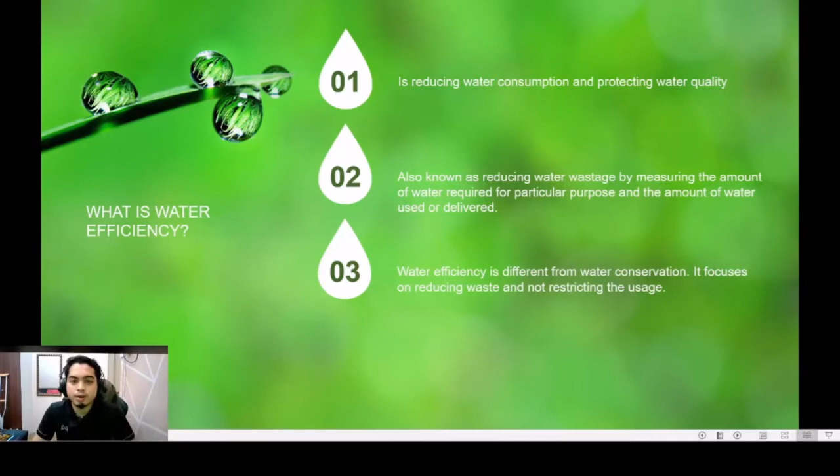Now, what is our strategy for water efficiency? First, we will minimize water discharge. Then we will use 100% wastewater recycling. After that, we use a rainwater harvesting system. Then we use high efficient water fittings. And last but not least, we will use the grey water system.

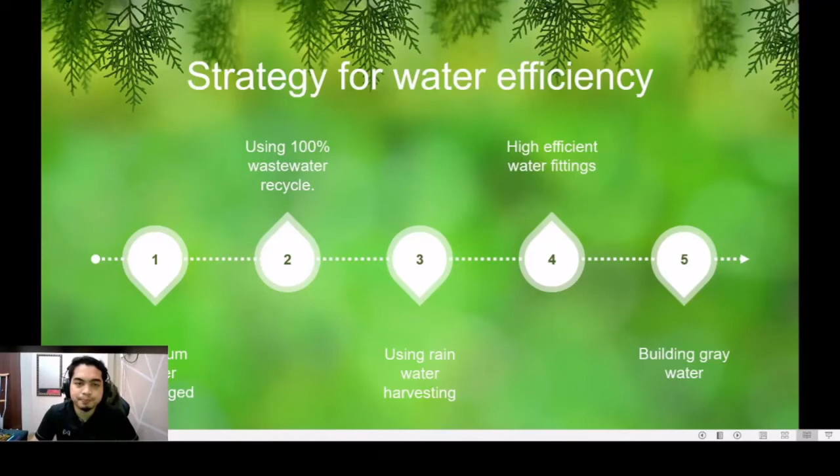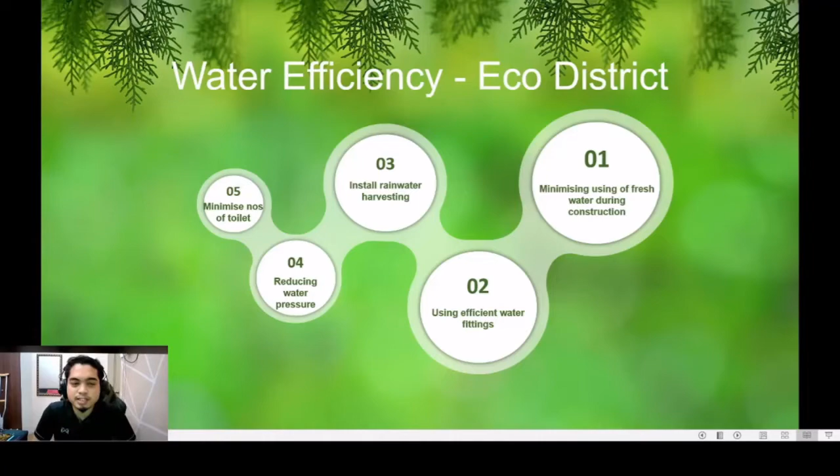So here I'm going to share the water efficiency that we apply in Eco District. First, we minimize the use of fresh water during the construction of Eco District. Then we use efficient water fittings, which is the water closet that only uses 1.28 liters per flush. After that, we install rainwater harvesting. Then we reduce the water pressure in the building. Last but not least, we minimize the number of toilets used in the building.

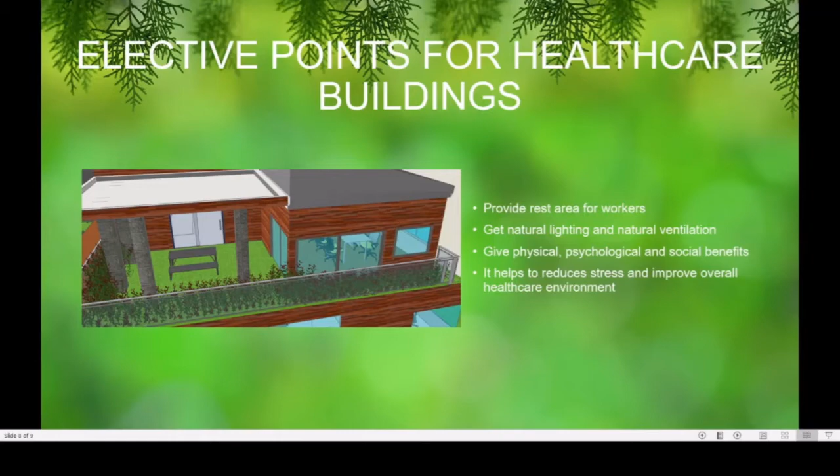Now I will explain about elective points for healthcare buildings. In this building, we provide rest areas for workers. It will give natural lighting and natural ventilation to workers, and also give physical, psychological and social benefit to workers. It helps reduce stress and improve the overall healthcare environment as well. So that's all from me. Thank you.

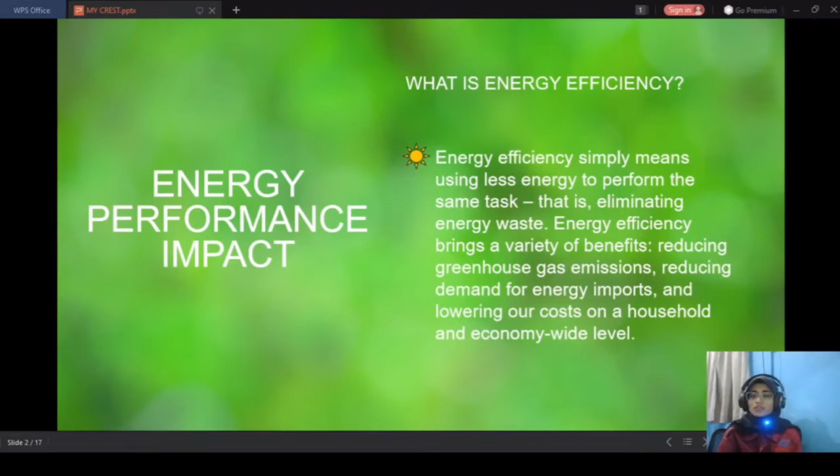Energy efficiency simply means using less energy to perform the same task, that is eliminating energy waste. Energy efficiency brings a variety of benefits such as reducing greenhouse gas emissions, reducing demand for energy imports, and also lowering our costs on a household and economy-wide level.

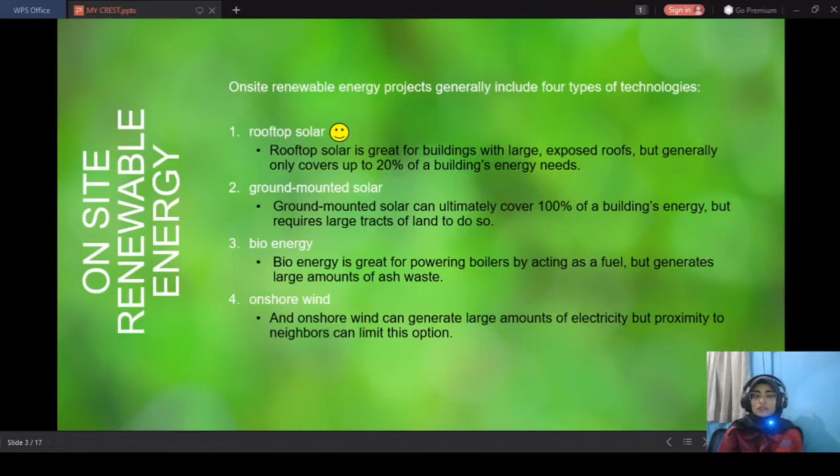For our building, we'll be using on-site renewable energy. There are 4 types of on-site renewable energy. The first one is rooftop solar, which is great for buildings with large exposed roofs but generally only covers up to 20% of a building's energy needs. Ground-mounted solar can ultimately cover 100% of the building's energy but requires large tracts of land. For bioenergy, it's great for powering boilers by acting as fuel but generates large amounts of ash waste. And onshore wind can generate large amounts of electricity but proximity to neighbors can limit this option. So this leaves us with only rooftop solar as the best design to use for our building.

For our building, we'll also be using passive solar design. Passive solar design means using the sun's energy for heating and cooling of living spaces by exposure to the sun. When sunlight strikes a building, the building can reflect, absorb, and transmit solar radiation. This will lower the use of lighting and small power.

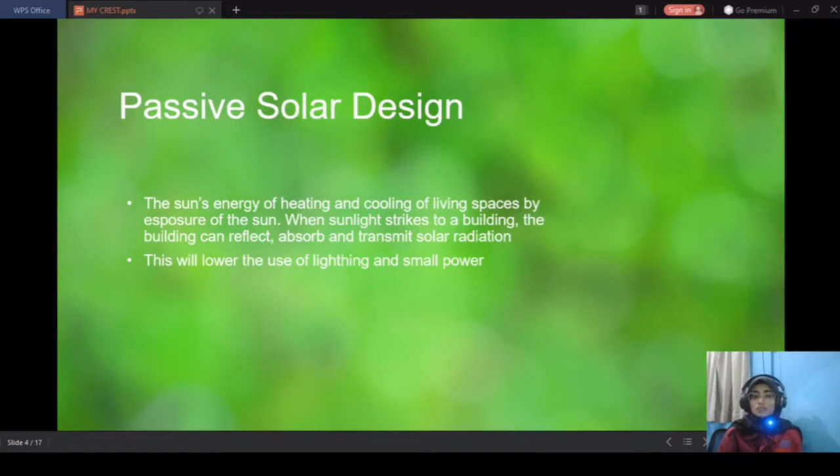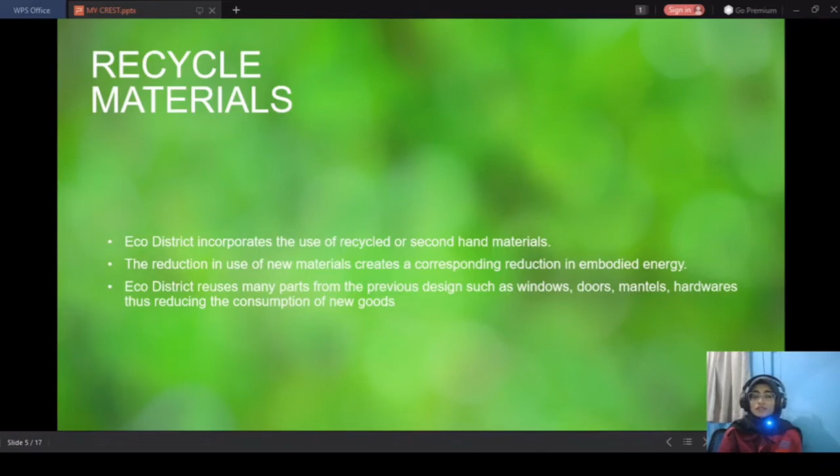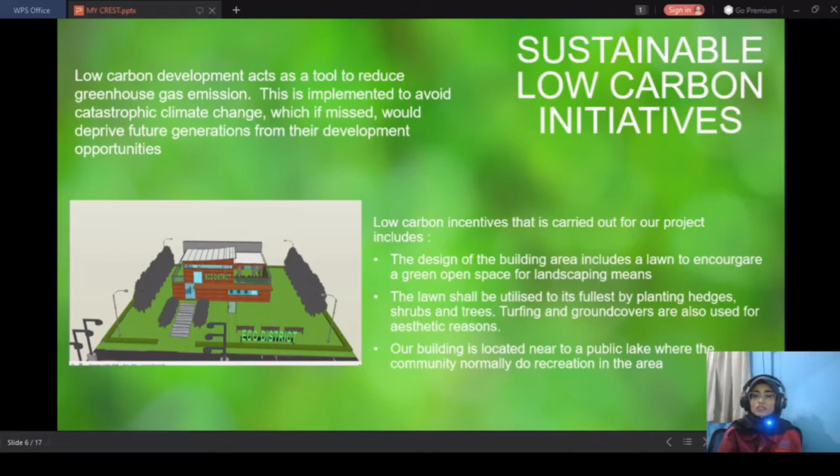Sustainable low-carbon initiatives: low-carbon development acts as a tool to reduce greenhouse gas emissions. This is implemented to avoid catastrophic climate change, which, if missed, would deprive future generations of their development opportunities. Low-carbon incentives carried out for our project include greening the building area, including a lawn to encourage a green open space for landscaping. The lawn shall be utilized to its fullest by planting hedges, shrubs and trees. Turfing and ground covers are also used for aesthetic reasons. Our building is located near a public lake where the community normally does recreation in the area.

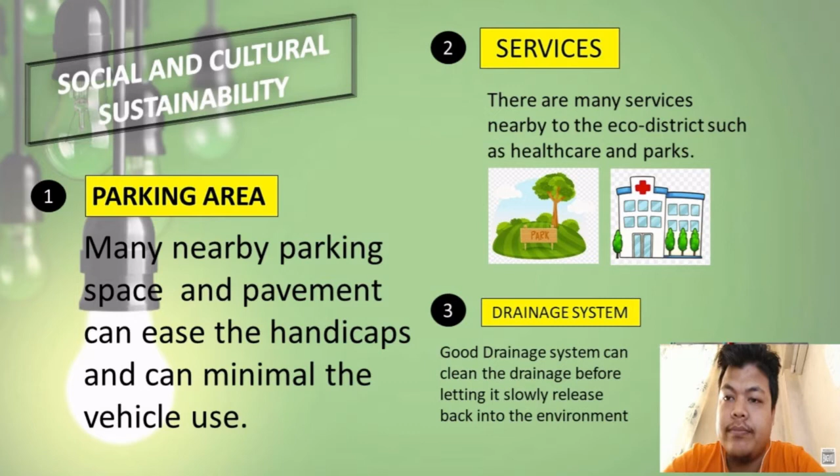In this case, the first is many nearby parking spaces and pavements surrounding the building. This can ease access for the handicapped and minimize vehicle use.

Second, there are many services nearby to the eco-district, like healthcare and parks. This can facilitate the affairs of nearby residents.

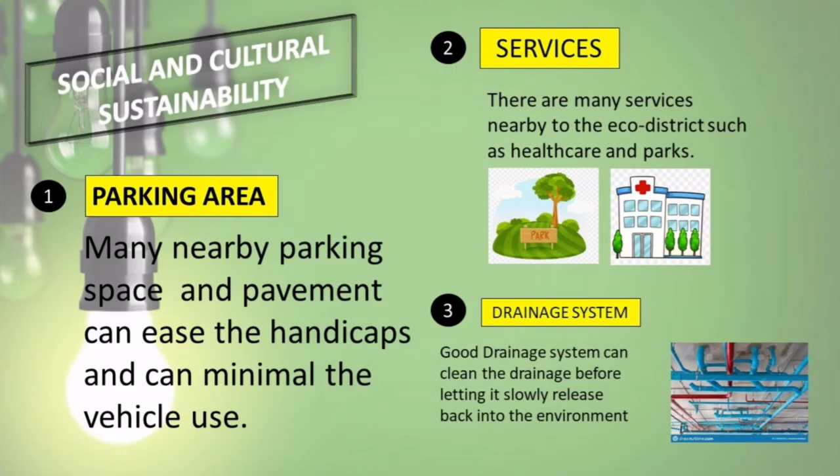Third, it has a good drainage system where it can clean the drainage before letting it slowly release back into the environment. Next, during the construction stage, we have reduced dust pollution. This is to avoid depletion of the ozone layer, haze, acid rain and global warming.

Next, we value a safe work environment to prevent accidents at the project site. We also use properly disposed waste and good sanitation during the construction stage. Lastly, we provide a MyCREST facilitator to make sure the work is done properly.

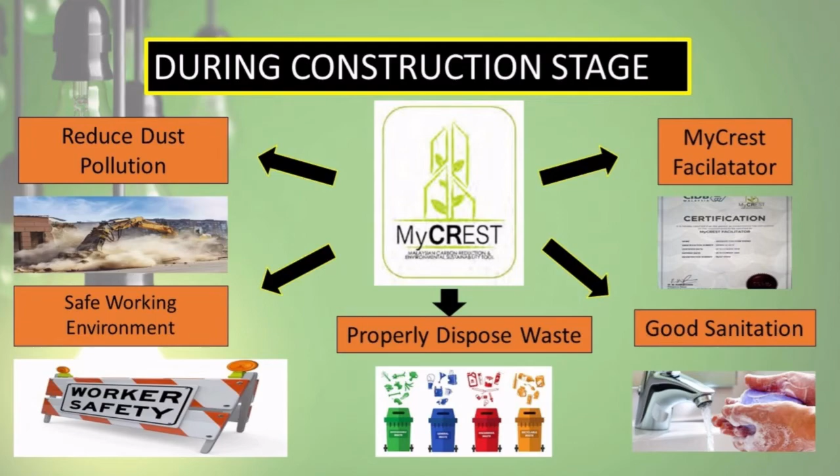Hi, this time I will explain about occupant health. In this regard, I focus on indoor air quality, where good air quality in and around the building is good to ensure the health and comfort of the occupants of the building.

In addition, we emphasize understanding and controlling general pollution in the office to reduce the risk of internal health problems. For the building, we use motorized mechanical ventilation air conditioning (MAVC) and install refrigerant components to reduce the cost of the building.

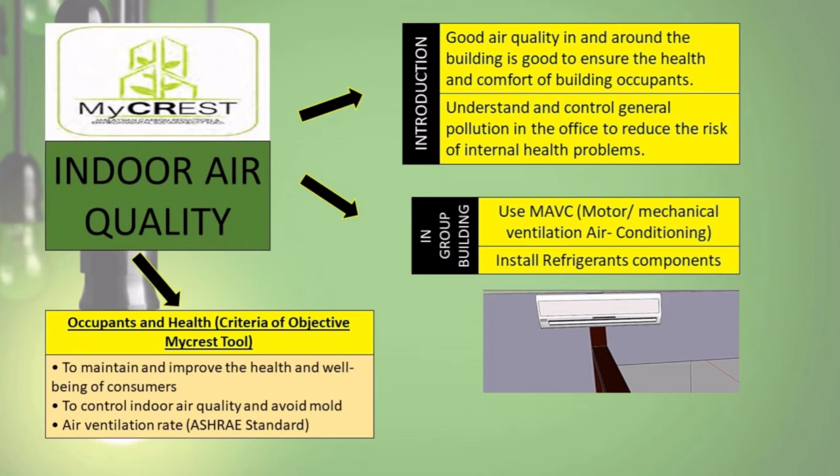Next, the criteria of the MyCREST tool in occupant health is to maintain and improve the health and well-being of consumers, and control indoor air quality and air ventilation rates based on ASHRAE standards.

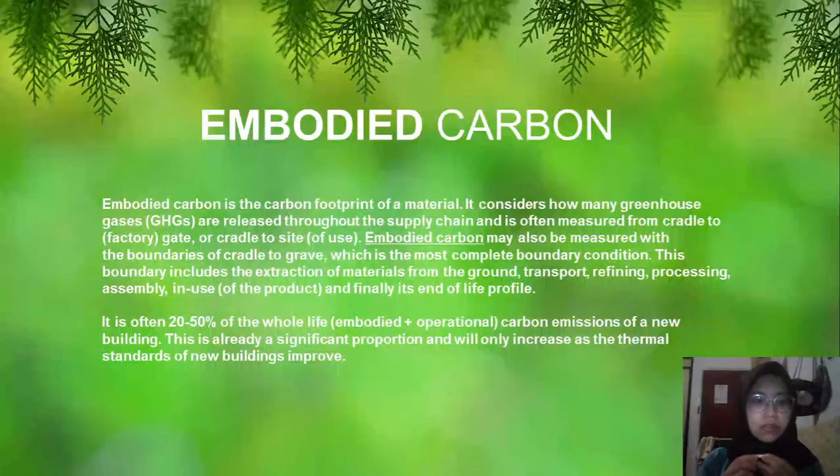How can we lower embodied carbon? By reusing buildings instead of constructing new ones, specifying low carbon concrete mixes, limiting carbon intensive materials, choosing lower carbon alternatives, choosing carbon sequestering materials, reusing materials, using high recycled content materials, maximizing structural efficiency, and minimizing waste.

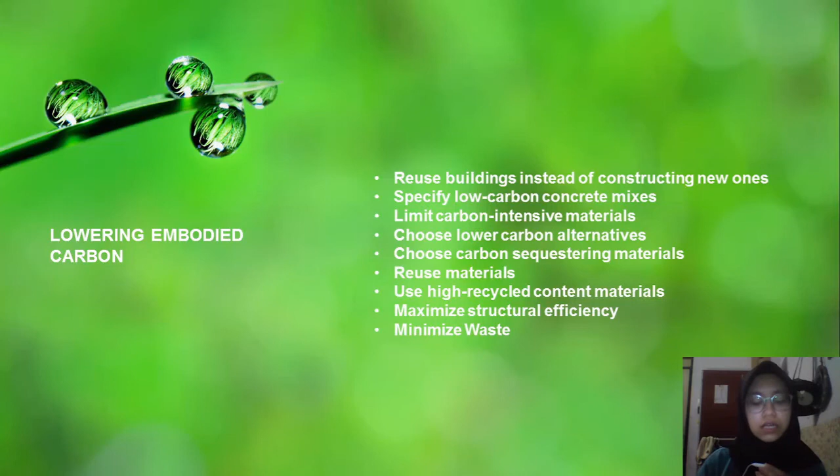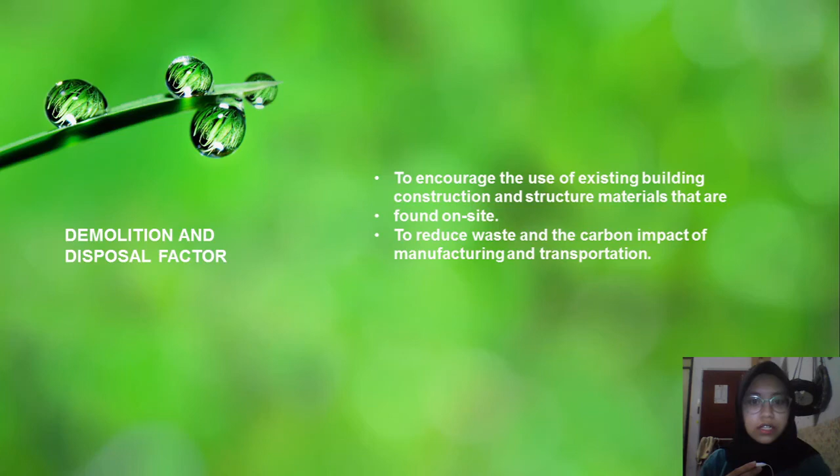Demolition and disposal factor is done to encourage the use of existing building construction and structural materials that are found on site, and to reduce waste and the carbon impact of manufacturing and transportation.

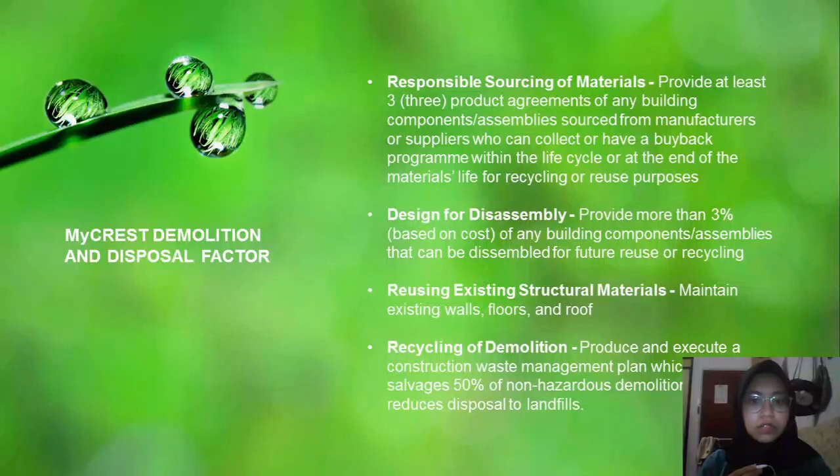In MyCREST, the demolition and disposal factor includes responsible sourcing of materials, design for disassembly, reusing existing structural materials, and recycling of demolition waste.

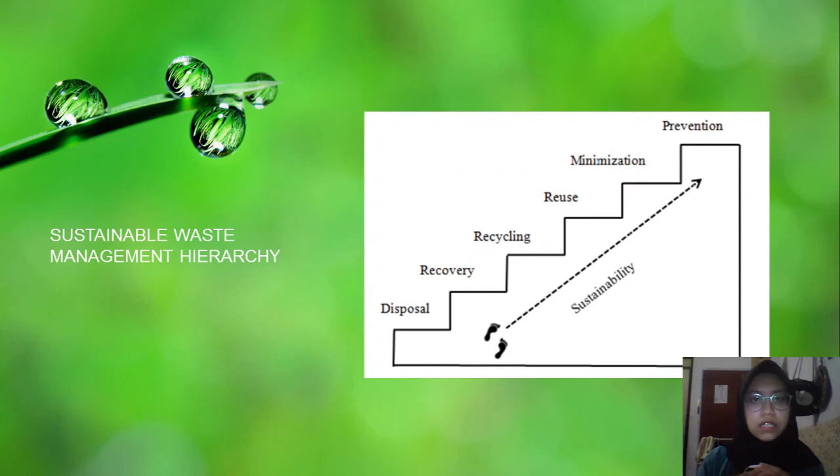What is the sustainable waste management hierarchy? It starts with prevention, then minimization, reuse, recycling, recovery, and if none of these are able to be carried out, then only disposal is to be chosen.

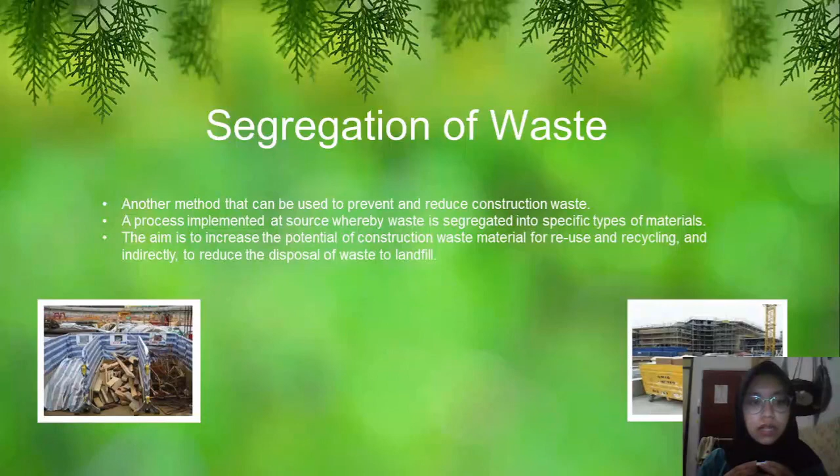In the eco-district, to lower the amount of waste, segregation of waste is carried out. This is another method that can be used to prevent and reduce construction waste, a process implemented at source whereby waste is segregated into specific types of materials. The aim is to increase the potential of construction waste material for reuse and recycling, and indirectly to reduce the disposal of waste to landfill.